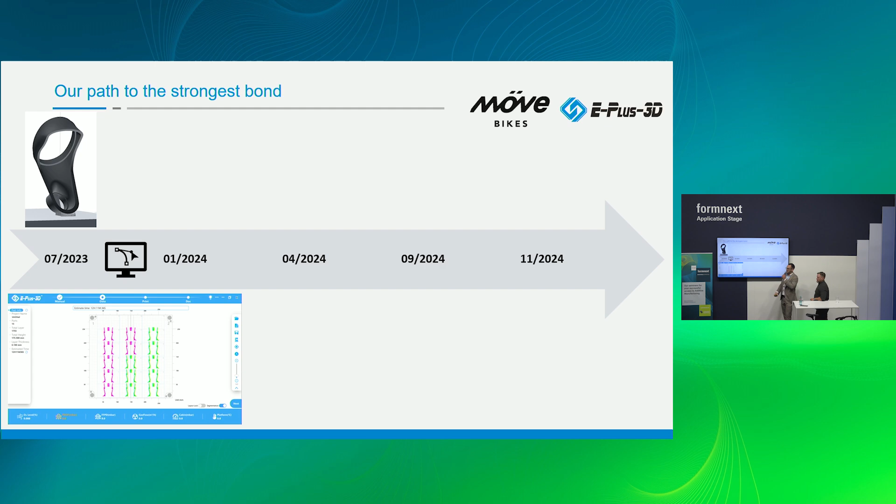All of that is titanium, grade 23. We use some very special support structures to keep them straight, because usually they would deform if you just printed them straight — they would strongly deform, latest at heat treatment. But what did we do? We printed them on our M650, a 650 millimeter platform.

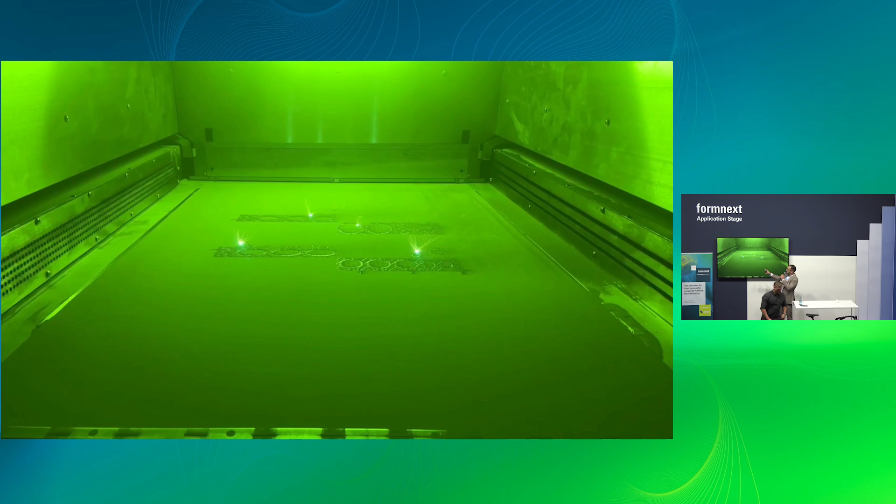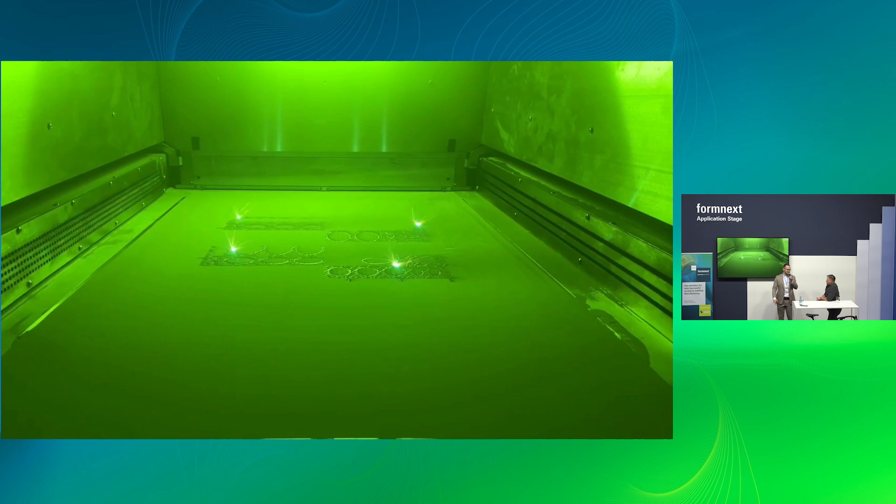This is just a short video where you can see we printed quite a lot of support structure, but this was necessary to keep the part straight. We printed 70 tubes in total, I think 70 or 80, in order to be able to make around 10 prototypes of this bike.

Yeah, 70 tubes - this is how we delivered them. Just a few days later, we had the lugs already. Tobias sent me this picture from his office where he connected the tubes already, and the first prototype was in reach.

We had quite an ambitious goal. You can see here we printed between January and March 2024. Then in March there was a huge event that was our deadline for the first prototype, the Eurobike, which happened at this exhibition in Frankfurt. Tobias filed for the Eurobike Award, and we were selected as a winner for one of the most advanced concepts in the bike industry, which we are very proud of.

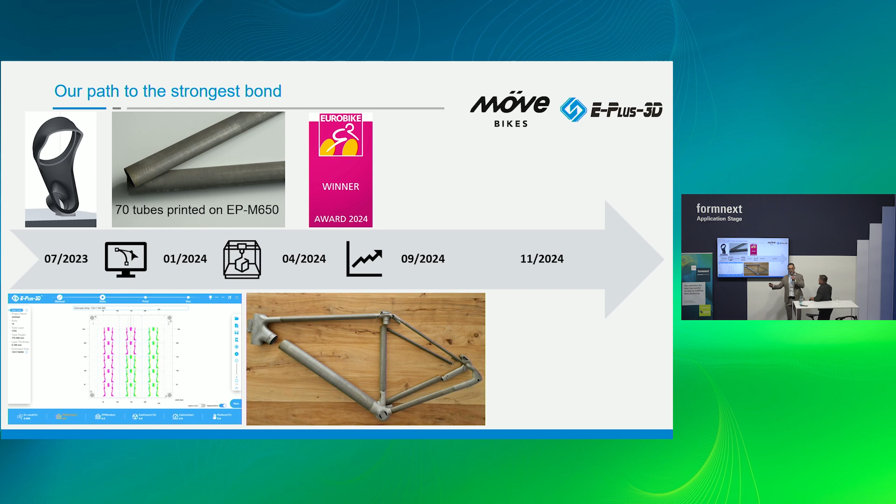Everything took its way until September this year. We got a lot of traction on social media, and in the end, Tobias' company and this bike, the Avian, also got awarded the German Design Award 2025. As you can see, the bike is an e-bike with an amazing design, so we got that prize as well.

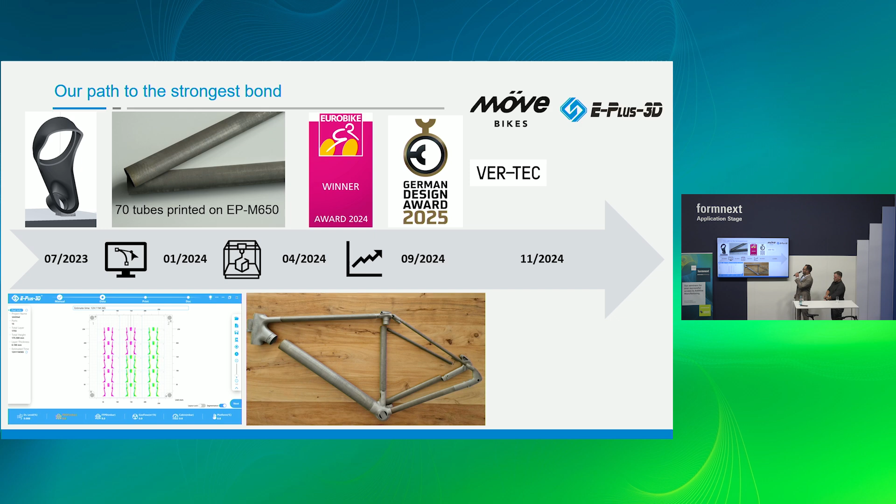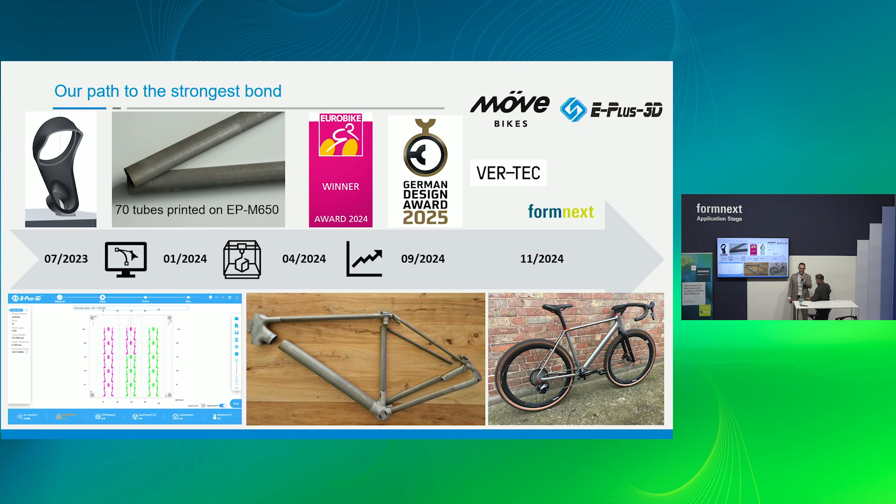Tobias introduced the VER-TEC technology, which is basically the connection technology between these parts. He will tell you something more about that. And now we are in November 2024 here at Formnext with the bike, and Tobias will tell you about the VER-TEC technology.

Okay, we have to hurry up, only 11 minutes, so I'll make it short. The idea is to make printing parts as small as possible because of the cost. You always have to have your costs in view. This was the first goal.

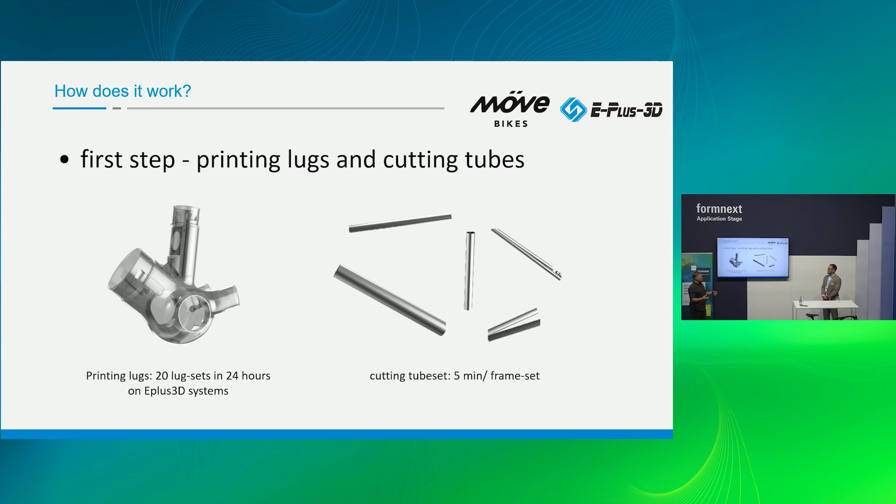The second goal was how I produce the tubes in series production. I decided for hydroforming because of the cost - it's always the cost. So I make these parts like a Lego principle. I created them to plug together, and then comes the next step.

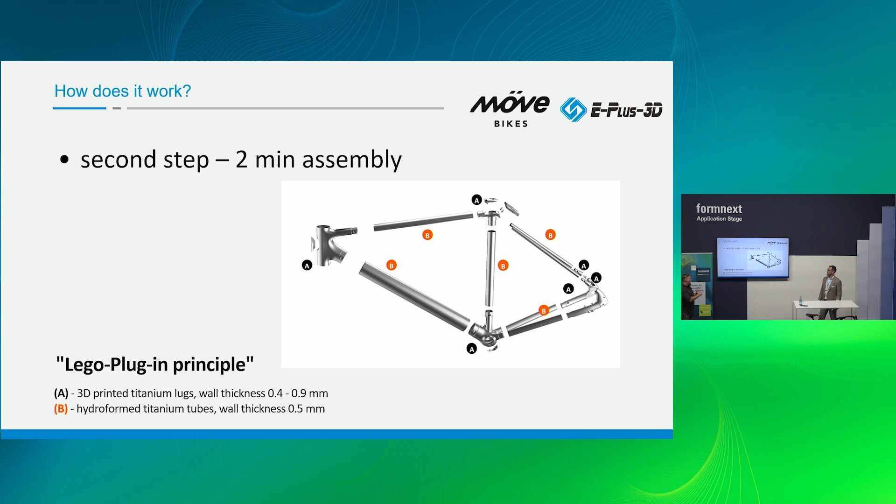I invented, with my partner Sika Power Solutions from Switzerland, a new injection bonding, additive bonding process. First of all, we put all the things together. Then we inject the glue from outside in less than 10 seconds for one chamber. I have well-defined glue chambers - that's the main thing we have to concentrate on because we need a stiff frame set.

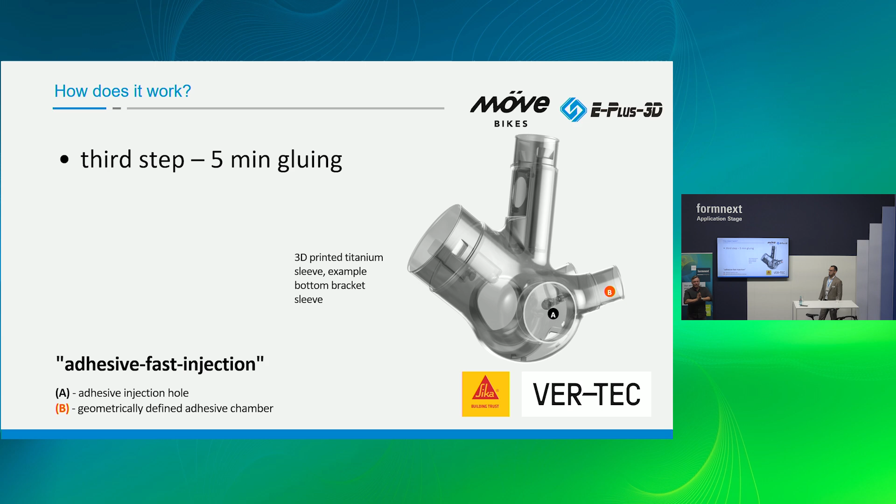Next slide - now the finish, the surface. I'm going through the fair and I see at every booth people trying to go higher, bigger. That's not the right way to go. Make it print fast and think about the post-processing because of the costs.

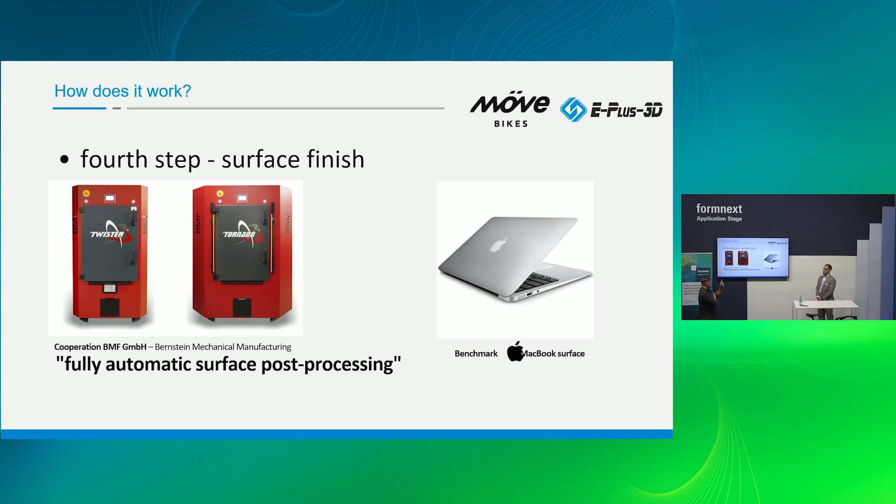Quality check in Germany - I'm a German engineer with over 20 years experience. Safety first, that's what I've done. This bike, we first checked, and we are more stable than all carbon fiber frames in the world.

Frame repair, sustainability - a big thing. I have invented a technology to repair the frame after we glue it. It's only 5 minutes and we can change the parts. Also at the end of the product life cycle, I can make the recycling for the lugs and the tubes, because titanium is a very expensive material.

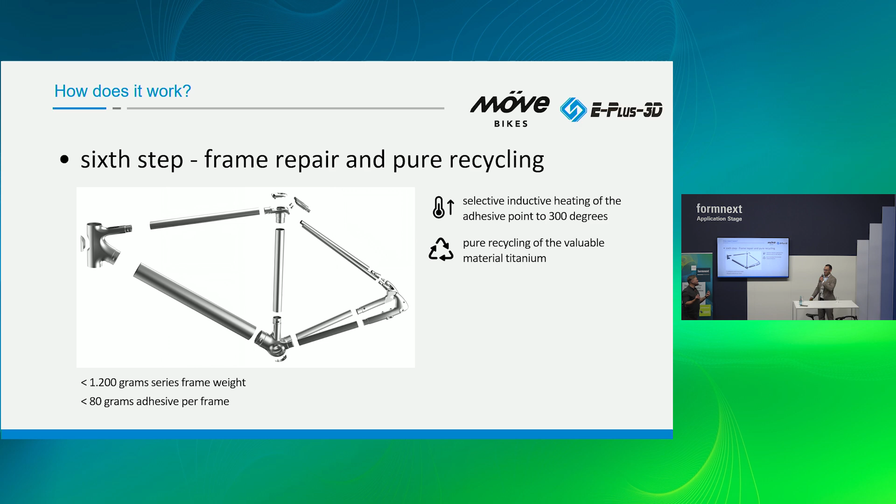Okay, go on - what we've reached with my team, with my technologies and my IPs: compared to a normal carbon fiber frame, where you have to invest 36 hours of production at the moment in Asia, I came down 97%. I'm under 1 hour to assemble this frame. Compared to a normal aluminum welded frame, I go down 93%. I made it cost efficient.

I think what this slide also shows - Tobias mentioned carbon frames are non-recyclable and made in Asia. With this technology, we can basically nearshore, we came back to Europe. We produce these frames in Europe at more than 40% lower cost than a carbon fiber frame from Asia now.

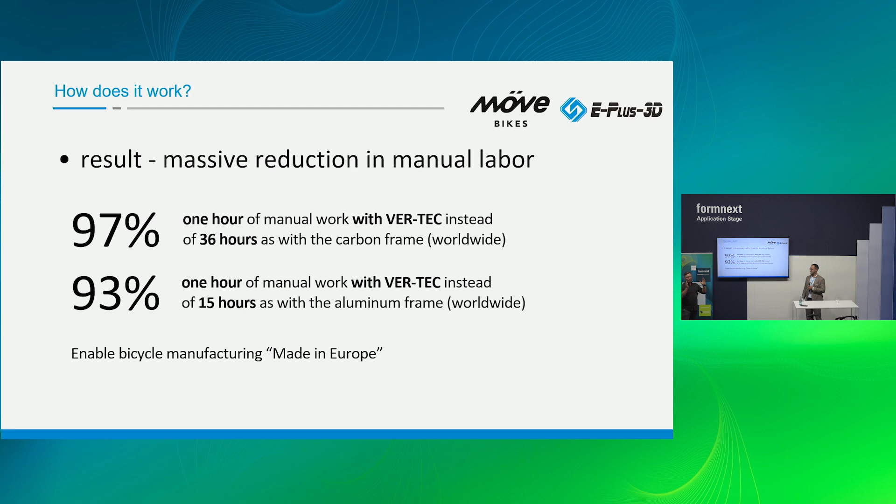Thanks, Tobias, for elaborating on the technology and VER-TEC more. I would like to give a little outlook on what we're going to do in the next upcoming months. Sorry, I made this slide this morning after waking up at 6:30, so the time schedule is a little bit messed up.

Anyway, right now, as Tobias mentioned, this is still the prototype series. We are in December finishing the design validation of the P3 prototype series, making all the tests Tobias mentioned, and early next year we'll ramp up production and deliver the bikes you can already order on Tobias' homepage.

Later next year there will be further development of other bicycles, because with parametric design of these lugs it's very easy with additive manufacturing. We go with a same-piece strategy, like a Lego principle, using more parts that are the same, and only changing the printed parts.